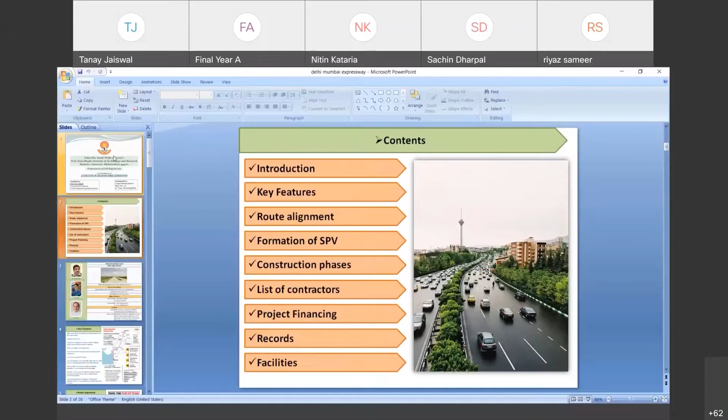Tanay. Yes, sir. Hello, sir. Yes, you are audible. Yes, Tanay, you are the presenter. Hello, sir, is the screen visible? No, it is not visible, Tanay. It's showing a blank screen. Just a minute, sir. Now, visible, okay. Hello, sir, now is it visible? Yes, now, Tanay. Yes. Okay, sir.

The development of any nation depends on the transportation networks and the ways in which they are being maintained. The same holds true for the development of a huge and populous nation like India. For connecting the areas and maintaining smooth flow of traffic, the construction of new and developed roads is a must. The same will be achieved with the implementation of Bharatmala Pariyojana project. Under the scheme, a host of new roads will be laid down in the nation.

So, I am Tanay Jaiswal, and today, through this presentation, we will look upon an overview of the Delhi-Mumbai Expressway that is being constructed under Phase 1 of Bharatmala Pariyojana.

This is how my presentation would proceed: from introduction to key features, to route alignment, to formation of SPV, construction phases, list of contractors, project financing, records, and facilities.

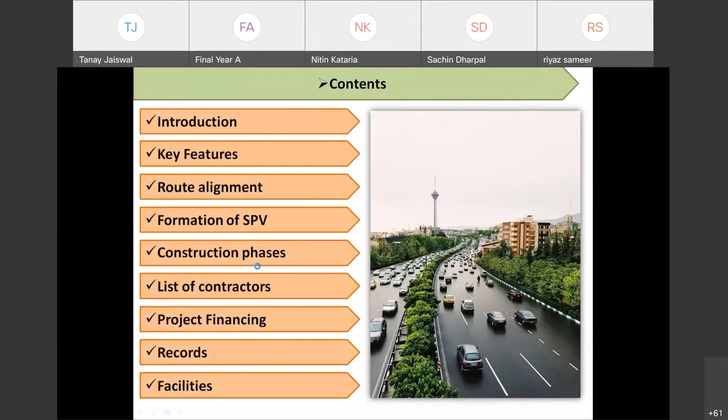The Delhi-Mumbai Expressway is a 1,350 km long, 8-lane wide expressway, expandable to 12 lanes, under construction, access-controlled expressway connecting India's national capital New Delhi with its financial capital Mumbai. The under-construction Vadodara-Mumbai Expressway has been subsumed in this project.

The foundation stone of the project was laid by Union Minister Nitin Gadkari in the presence of Sushma Swaraj and Arun Jaitley on 8 March 2019. The total project value, including the land acquisition cost, is around 90,000 crores.

An additional 30 km long spur will also be constructed by the NHAI from Noida International Airport in Jewar to Ballabgarh on this expressway. Upon completion in January 2023, it will become the world's longest expressway.

The Delhi-Mumbai Expressway will connect DND Flyway in Delhi to Jawaharlal Nehru Port in Maharashtra via Dausa, Kota, Ratlam, Vadodara, and Surat. It passes through the states of Delhi, Haryana, Rajasthan, Madhya Pradesh, Gujarat, and Maharashtra.

The main length of the expressway, although, is from Sohna to Virar only, that is 1,198 kilometers. But additionally, it has two spurs, the DND-Faridabad-KMP Expressway and Virar-Jawaharlal Nehru Port International, which increase its length to 1,350 kilometers.

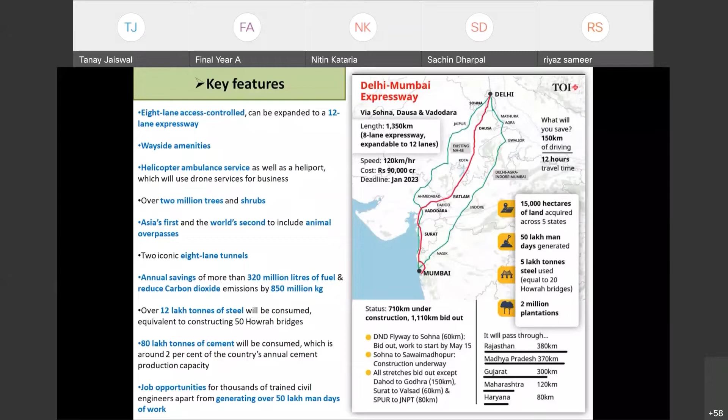Now, let's look at the connectivity and route alignment of the project. The Delhi-Mumbai Expressway will be directly connected with other expressways like Delhi-Noida Direct Flyway in Delhi, Kundli-Manesar-Palwal Expressway in Haryana, and Ahmedabad-Vadodara Expressway in Gujarat.

In Maharashtra, it will be connected with Mumbai-Nagpur Expressway and Mumbai-Pune Expressway. The expressway will have multiple side spurs in the future, which will help commuters connect with other major cities that are not directly connected on the main route.

In August 2021, the NHAI approved a 30-kilometer long additional side spur connecting Noida International Airport in Jewar with Ballabgarh in Haryana on this expressway.

At the Delhi end, the Delhi-Mumbai Expressway has 2 main entry or exit points: DND Flyway in Delhi, and Alipur village north of Sohna in Haryana. Traffic coming from both ends and moving towards either Vadodara or Mumbai will merge at the Cloverleaf interchange with KMP Expressway in Nuh district of Haryana.

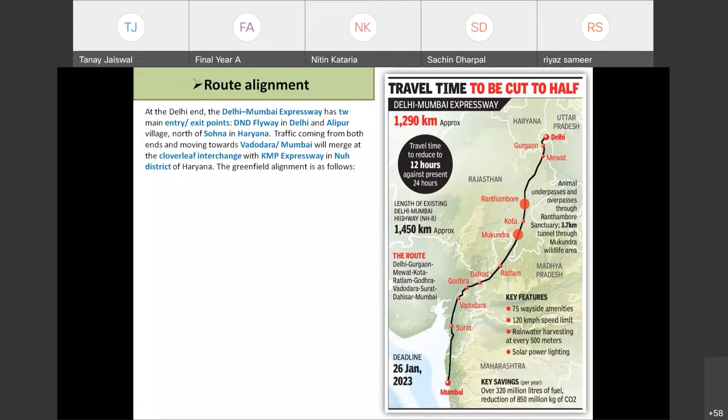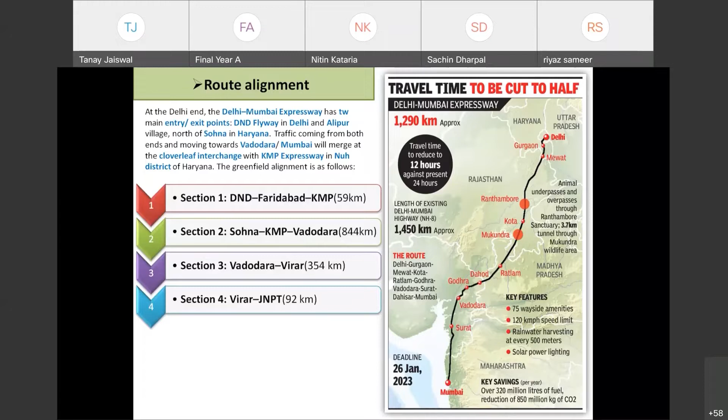The greenfield alignment is as follows: the first section would be DND to Faridabad to KMP Expressway. The second section would consist of Sohna, KMP to Vadodara. The third section would be Vadodara to Virar, and the fourth section would be from Virar to Jawaharlal Nehru Port Trust.

Now let's discuss section 1 of the project. Section 1 is the Delhi-Noida Direct Flyway to Faridabad to Kundli-Manesar-Palwal Expressway. It will start at the NCT of Delhi, the National Capital Territory, from the junction of DND Flyway and the Ring Road at Maharani Bagh on the Yamuna River's west bank. From there it will pass through Okhla, Shaheen Bagh, Kalindi Kunj and Jaitpur along the Agra Canal.

Then it will enter Haryana through Faridabad, Ballabgarh bypass road, and enter Kailgaon on the Delhi-Agra Expressway, National Highway 2. From Kailgaon, it will join the cloverleaf interchange with KMP Expressway at Khalilpur village in Nuh district.

Talking about its construction, NHAI has divided the construction of the DND-Faridabad-KMP section of the Delhi-Mumbai Expressway into 3 packages, and its construction cost is around 3,313 crores, excluding land acquisition and utility shifting costs.

The first package is from the junction of DND Flyway and Ring Road in Delhi to Jaitpur Pushta Road in Delhi. The length is 9 kilometers, and the value is 1,422 crores, in the state of Delhi.

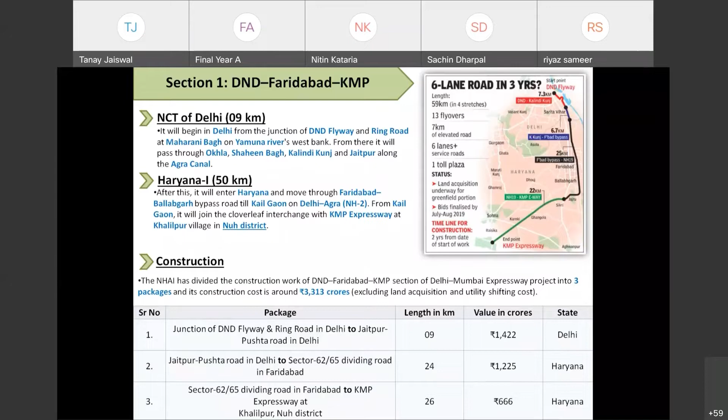Talking about section 2, which consists of Sohna to Kundli-Manesar-Palwal to Vadodara Expressway. It will start in Haryana at National Highway 248A at Alipur village, north of Sohna. Then it will move to NH 919 where a flyover interchange takes place west of Sancholi, then a cloverleaf interchange with KMP Expressway at Khalilpur village.

From there it will move to MDR 134, that is Major District Road 134, to MDR 132, then MDR 135, then MDR 131, to State Highway 22, finally ending in Kolgaon village on the Haryana-Rajasthan border.

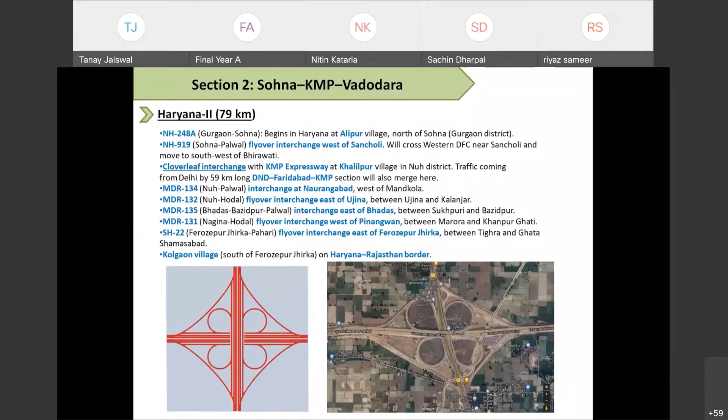From there it will enter the state of Rajasthan at National Highway 248A, Naugaon village, from where it will move to State Highway 25A, to National Highway 21, to National Highway 23, National Highway 552, State Highway 29, to National Highway 27, and finally ending at State Highway 9A, where an interchange takes place to the east of Rawat Bhatta.

Then it will enter Madhya Pradesh from east of Bhanpura and Neemuch interchange on State Highway 31A, to east of Gharoth, to east of Sitamau-Mandsaur interchange on State Highway 14, east of Jaora to west of Ratlam, and ending to the west of Thandla.

Then it will emerge in Gujarat at Chayan village in Dahod district, where a National Highway 56 interchange takes place. Then it will move northeast, to north, to west, to southwest of Godhra, and finally end at the Ahmedabad-Vadodara Expressway interchange in Dhodka village.

Now let's look at the third section, from Vadodara to Virar. It will start where the previous section ended, from the Ahmedabad-Vadodara Expressway interchange in Dhodka village, to northwest of Vadodara, then west of Vadodara, then west of Bharuch, where an interchange takes place with the Bharuch-Dahej highway.

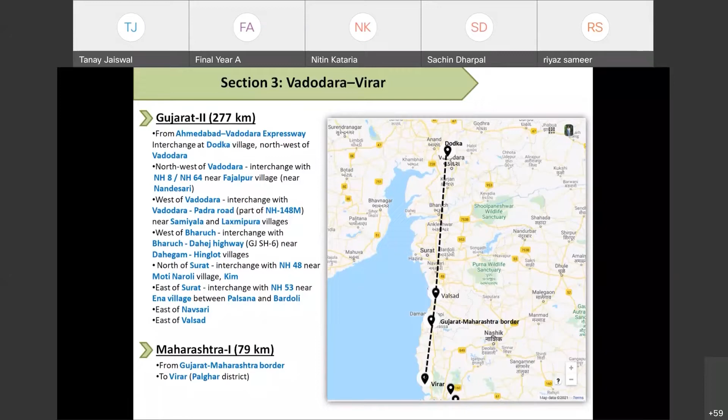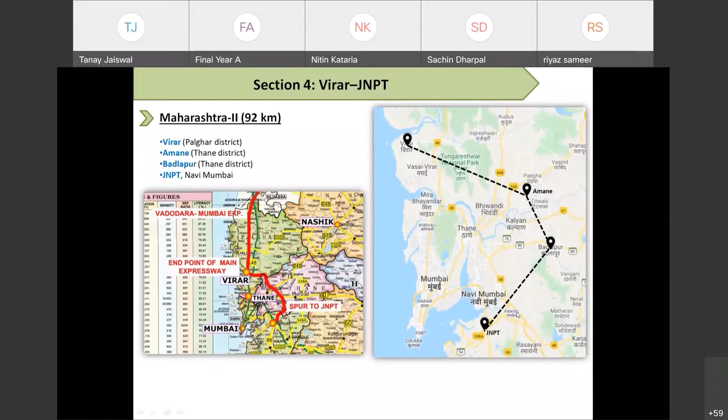Formation of SPV: NHAI, the National Highway Authority of India, has formed a special purpose vehicle, SPV, to finance the construction and operation of the Delhi-Mumbai Expressway. The SPV has been registered on 29th August 2020 by the name DME Development Limited, abbreviated as DME-DL, and it will be wholly owned by NHAI. By floating an SPV specific to the corridor, NHAI is aiming at diversifying its resource base to develop a sustainable and self-liquidating approach to raise finances.

The toll on the projects housed in the SPV shall be collected by NHAI, and the SPV shall get annuity payments without any construction and tolling risks. In March 2021, DME Development Limited received the highest AAA credit ratings from CRISIL, Care Ratings, and India Ratings.

Now let's talk about the construction phases. The entire 1,350 km long Delhi-Mumbai Expressway has been divided into 4 sections, as we have seen earlier, with a total of 52 construction packages or tenders, where the length of each package is between 8 km to 46 km.

Section 1, DND Faridabad to KMP, would be of length 59 km, with 3 packages, one in Delhi and 2 in Haryana. The second section, KMP to Vadodara, would be of the whopping length of 844 kilometers, with 31 packages, divided as three packages in Haryana, 13 in Rajasthan, 9 in Madhya Pradesh, and 6 in Gujarat.

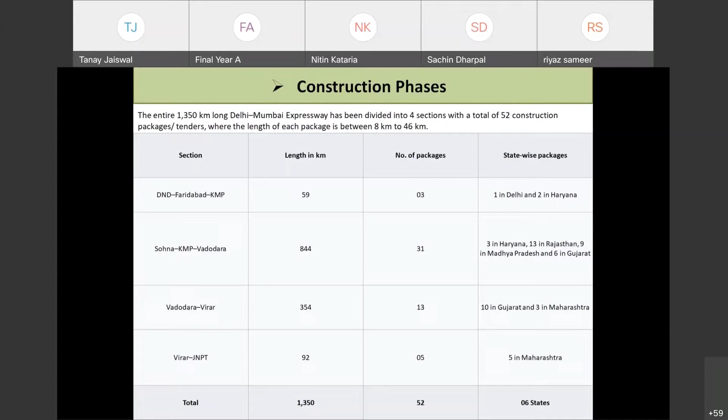Vadodara to Virar would be of length 354 kilometers, divided into 13 packages, 10 in Gujarat and 3 in Maharashtra. From Virar to Jawaharlal Nehru Port Trust, the length would be 92 kilometers, with 5 packages, all in Maharashtra. Thus the total length comes out to be 1,350 kilometers, with 52 total packages across the 6 states of Delhi, Haryana, Rajasthan, Madhya Pradesh, Gujarat, and Maharashtra.

Now let's talk about the list of contractors. The NHAI has awarded the construction work in 52 packages, as discussed earlier, to around 20 construction companies. Around 15,000 hectares of land has been acquired for this project. The list of contractors is as below.

Then KCC Buildcon, Larsen and Toubro, Monte Carlo, Patel Infrastructures have got a length of 53 kilometers for 2 packages in Gujarat, PNC Infratech, RKC Infrabuild, Roadway Solutions India Infra.

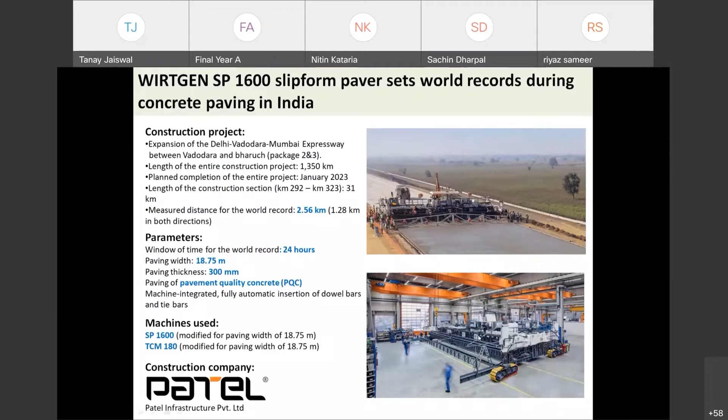In the span of 24 hours, Patel Infrastructures set world records, cementing their name in the Indian Book of World Records and Golden Books of World Record. The first world record they made was the highest quantity of pavement quality concrete laid in 24 hours, that is 14,613.3 cubic meters of concrete.

They didn't end here. They again made a world record of largest quantum of pavement quality concrete produced in 24 hours, that is 14,370 cubic meters of concrete.

They didn't end here. They also made the third world record of laying the pavement quality concrete in 18.75 meters width continuously for 24 hours, that is 1,280 meters in both the lanes.

And they finally made the last world record on the same day for largest area of rigid pavement quality concrete laid on an expressway in 24 hours, that is 48,711 square meters. Hush, that's a lot of world records for a single day.

Now let's see about GR Infra projects. Between Kamliya to Kandarwasa village in Madhya Pradesh, GR Infra projects employed 300 dumpers, 80 excavators, 60 soil compactors, 50 tankers that would be moving around 70 lakh cubic meters of earthwork.

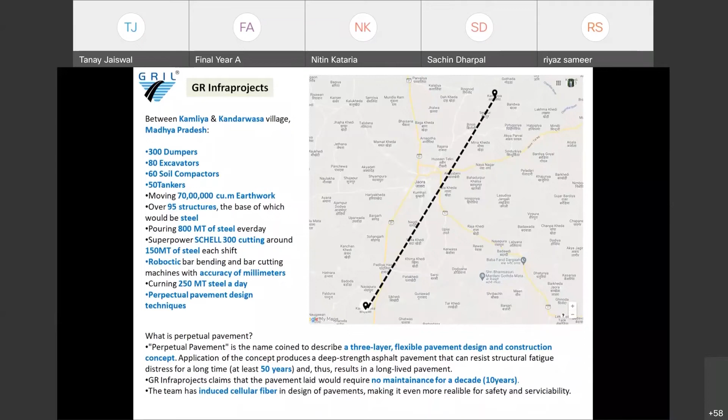Again, Narmada Steel Bridge was built in the record time of 32 months, says Nitin Gadkari in the newspapers. The general information of this bridge was the time and status. Beginning of the work was in 2014 and it was completed on 7th March 2017.

The project type was extra-dosed bridge. Extra-dosed bridge is a combination of a cable stayed bridge and a box girder type bridge. The function was a road bridge. Material used was pre-stressed concrete. Location is between Bharuch in Gujarat, India, constructed by Patel Infrastructures and L&T, along with Dywidag Systems International.

The estimated cost was around 379 crores. Talking about the technical information, the dimension of the main span was 144 meters. The total length was 1400 meters. The side lengths on both the sides were 96 meters, and there were 7 spans of 144 meters in between.

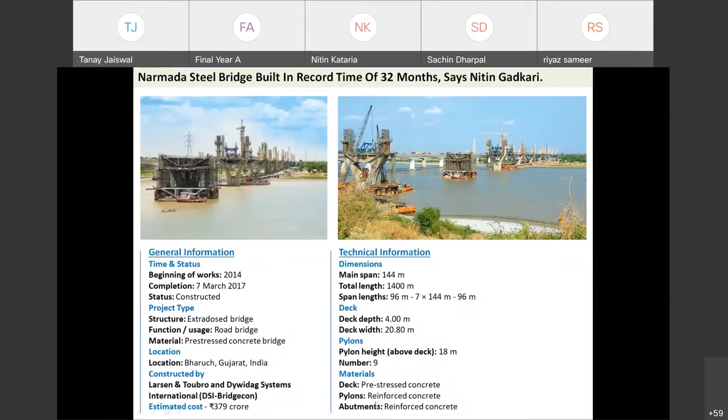The deck depth was 4 meters. The deck width was 20.8 meters. The pylon height above the deck was 18 meters, and there are 9 pylons provided. The material for deck used was pre-stressed concrete. For pylons, it was reinforced concrete. For abutment, it was reinforced concrete.

The new bridge will have the longest span in India. It consists of 96-meter long side spans and 8 144-meter long main spans. The structure will be the first extra-dosed bridge in the state of Gujarat and will have the country's longest span. Each of the center spans consists of 38 precast concrete hollow box girder segments, each 3.55 meters long.

At each of the pylons, there are 2 stay cable planes consisting of 6 stays arranged in a fan pattern to support the bridge deck. In total, DSI Bridgecon supplied and installed 216 stay cables, each 27.5 to 70 meters long, with a strand tonnage of 500 tons. The stay cables were anchored at the bridge deck using anchorages and at the pylons using the anchor box system. In this system, the stay cable anchorages are located outside permits slender pylon shapes because the interior of the pylon does not need to be accessible.

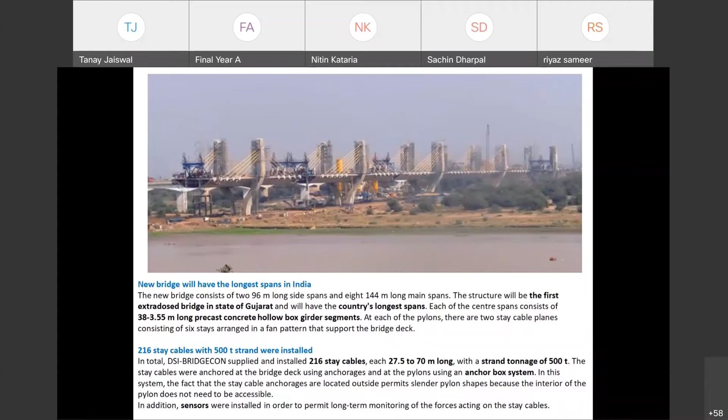In addition, sensors were also installed to permit long-term monitoring of the forces acting on the stay cables. Now let's see about some of the facilities that were provided under this project. The first is wayside amenities.

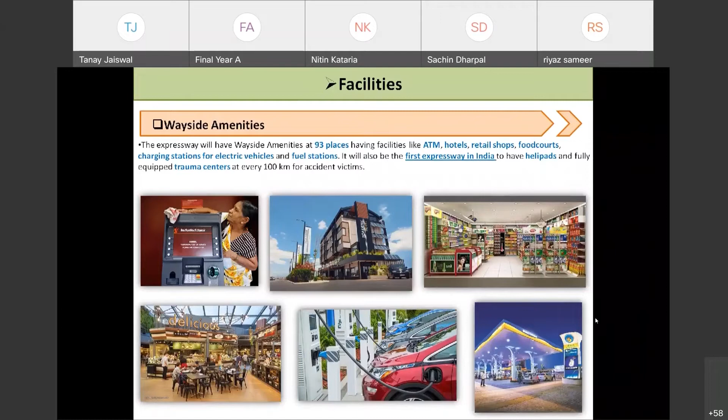We have talked about it earlier, but wait, there is more. The expressway will have wayside amenities at 93 places, having facilities like ATM, hotels, retail shops, food courts, charging stations for electric vehicles, and fuel stations. It will also be the first expressway in India to have helipads and fully equipped trauma centers at every 100 km for accident victims.

There would also be India's first electric highway. On March 25, 2021, Union Minister Nitin Gadkari said in Lok Sabha that there is a plan to develop a stretch of this expressway as an e-highway, where trucks and buses can run at speeds of 120 to 150 km per hour, which will bring down logistic costs by 70% as heavy vehicles will run on electricity instead of diesel.

The NHAI has started construction of this project and is expected to complete it by March 2022. It will also have 4 dedicated lanes for electric vehicles out of the 8 lanes provided in the entire expressway.

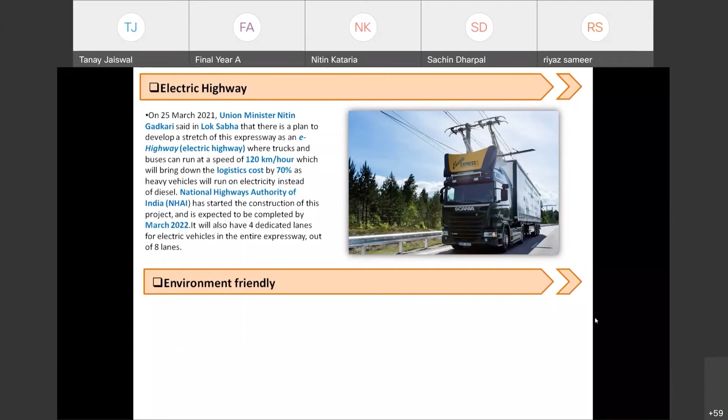Another thing construction should ensure is that it be environment friendly. The Delhi-Mumbai Expressway is being developed as an environment-friendly expressway with a tree cover of 2 million trees, watered with drip irrigation along the entire stretch, with a rainwater harvesting system every 500 meters. The expressway will be lit using a mix of power supply from the state grids and solar energy.

It would also be Asia's first expressway to have a wildlife crossing. A combined length of 2.5 kilometers of this 8-lane wide expressway will run under 5 natural-looking wildlife crossings on stretches identified as known wildlife corridors between tiger reserves. One of these crossings would be a tunnel in Mukundara Hills National Park, which will be the country's first 8-lane wide tunnel. This will be the first expressway in India to have a wildlife crossing.

The crossings over the expressway will have 8-meter tall noise barrier walls on either side. An uncovered stretch passing through the wildlife corridors will have 6-foot tall walls on both sides of the expressway to prevent animals and pedestrians from entering, minimizing the impact of traffic zipping past at speeds of 120 to 150 kilometers per hour.

This expressway runs through Aravalli wildlife corridors, specially affecting corridors between 4 tiger reserves of Rajasthan, namely Sariska Tiger Reserve, Mukundara Hills National Park, Ranthambore National Park, and Ramgarh Vishdhari National Wildlife Sanctuary, all of which are important tiger reserves in India.

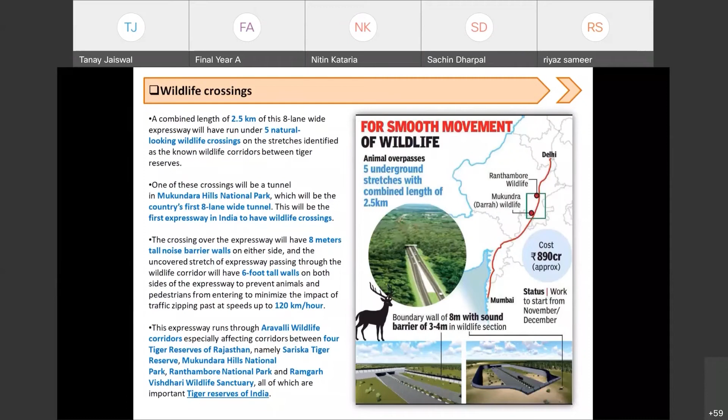Here, I conclude my presentation.

Steady progress is being made on the rupees 1 trillion Delhi-Mumbai Expressway project, spanning up to 1,350 kilometers. The 8-lane expressway, being built under the engineering, procurement, and construction route, would reduce the distance between the two cities by over 150 kilometers, cutting travel time from 24 hours to just 13 hours. Likely, it is going to be ready in 2023 to 24.

The project was a necessity because of heavy traffic congestion on the Delhi-Mumbai National Corridor along NH48 of the Golden Quadrilateral. The 6-lane corridor, a critical component of the country's road network, sees average traffic of around 80,000 passenger car units, and the figure is expected to rise to around 100,000 PCUs soon.

The Delhi-Mumbai Expressway, being constructed under Phase 1 of Bharatmala Pariyojana, which would go on expanding road networks up to 28,000 kilometers, is possibly the best solution for all the traffic problems that the northern and western states of India are encountering.

New innovations, massive growth in resource management, cutting through uneven terrains, and completing the project at never-seen-before speed are a few things that truly make this expressway an engineering marvel.

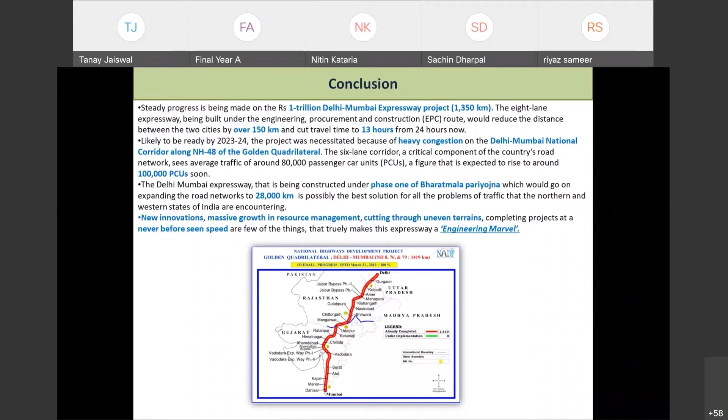Hello. Yes, any questions?

Yes, Tanay. Yes, sir. What is the difference between the national highway and state highway?

Sir, the national highway is maintained by the central government of India, whereas the state highways are maintained by the state governments of respective states. Moreover, the length of national highways is much longer than that of state highways.

And in between two lanes, why are we providing the trees, and what is the height of those trees? Is there any standard format for the height of trees?

Sir, actually, there is a study called arboriculture about trees. For this Delhi-Mumbai Expressway, 2 million trees are to be planted, and the height considered, as required by IRC codes, is 1.5 meters on the sides of the expressway.